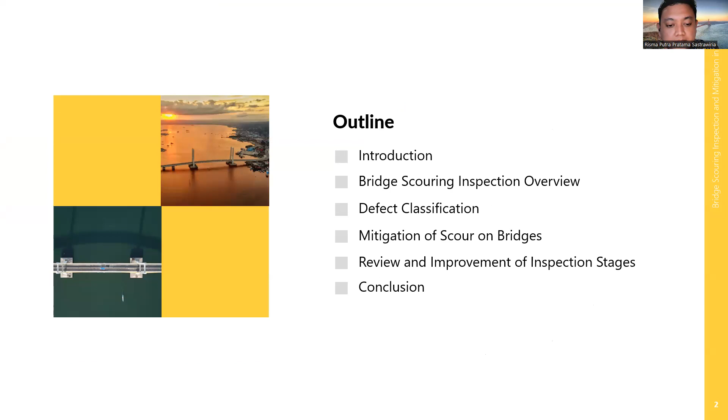Bridge failure due to scouring in Indonesia has reached more than 3,000 unit collapses, calculated over the last 10 years. This data was obtained from the manual collection of the National Disaster Management Agency, based on reports and information from the field. This condition caused many problems, including traffic jams and disruption of logistic delivery around the affected area. This should provide awareness that bridges are an important part of the road network structure.

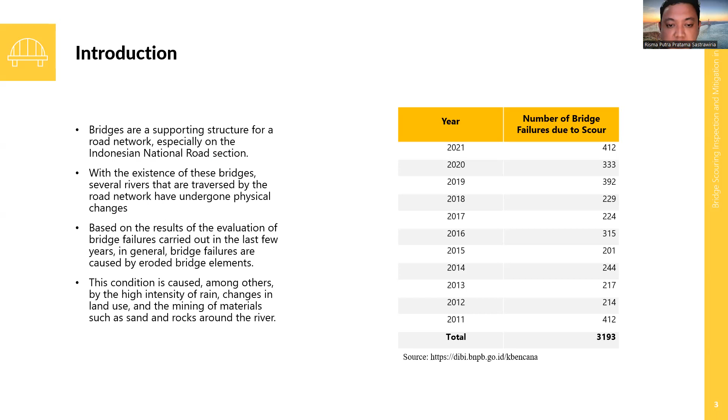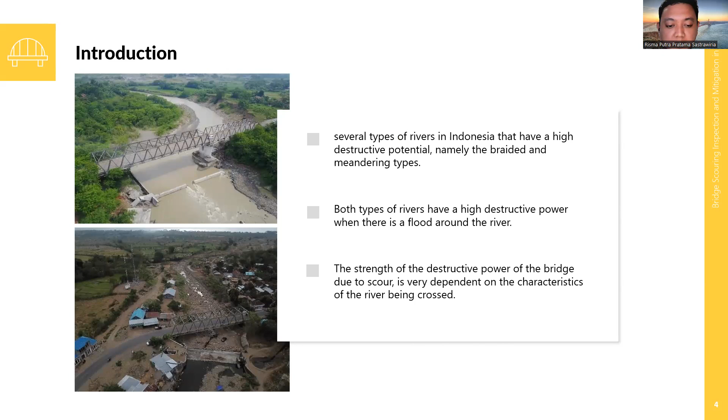Several bridges in Indonesia are located on rivers that have high potential to damage and erode the bridge. The types of rivers with this potential are braided and meandering rivers, and these two types have caused a pretty bad record on bridge performance in Indonesia.

In a recent case in 2020, there were 3 bridges that collapsed at the same time in one area of the national road section, caused by heavy river flows. All affected bridges were in the same area, causing transportation and logistic obstruction. The 3 bridges are Kosio Bridge, Sinandaka Bridge, and Sinandaka 2 Bridge.

In addition, there are about 15 other bridges, some heavily damaged and some in critical condition.

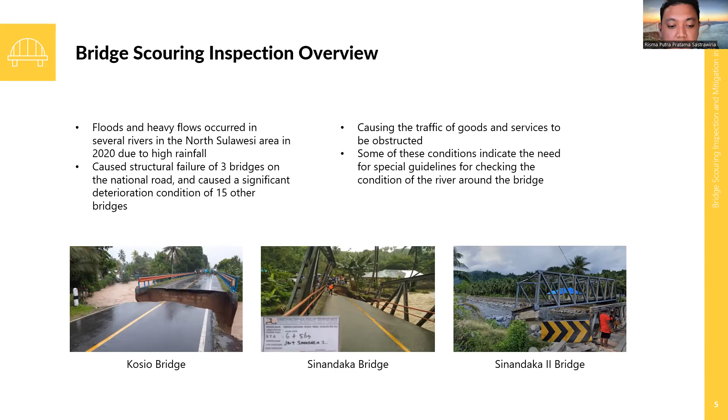Based on this situation, the Directorate General of Highway required a more detailed guideline to provide assessment of the condition of the river around the bridge. This guide is prepared in the context of mitigation and is part of the overall bridge management system in Indonesia. These guidelines were officially published in mid-2021, about 1 year after the great disaster occurred.

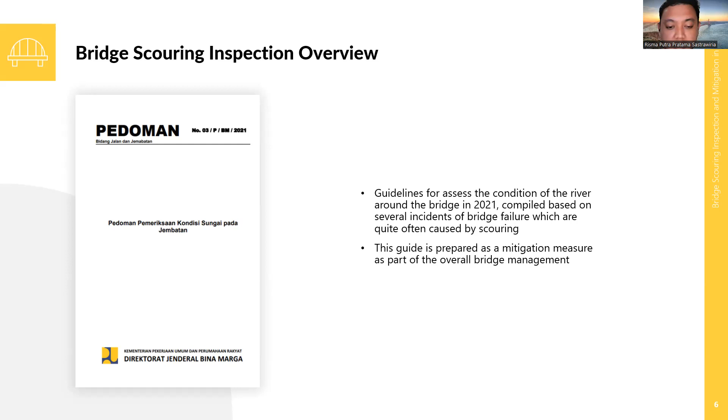Several things are clarified in the guidelines, including the procedure for assessing the condition of the bridge, which starts with determining the type of river around the bridge. With this stage of determining the type of river, it's hoped that we can improve a more objective assessment of bridge condition.

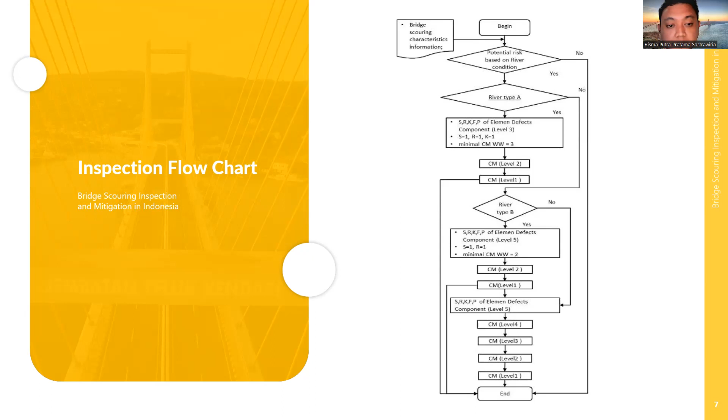The condition mark is given as follows: Condition 0 is a condition with no defect. Condition mark 1 is very minor defects. Condition mark 2 is defects that require monitoring or maintenance in the future. Condition mark 3 is a defect which requires attention soon. Condition mark 4 is bridge in critical condition. Condition mark 5, the element is broken or the bridge is no longer functioning.

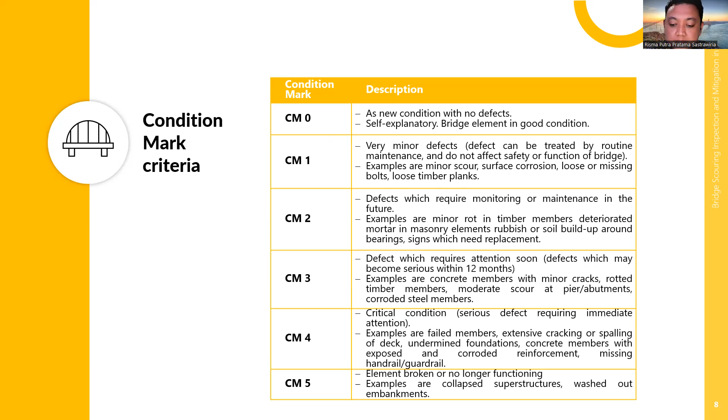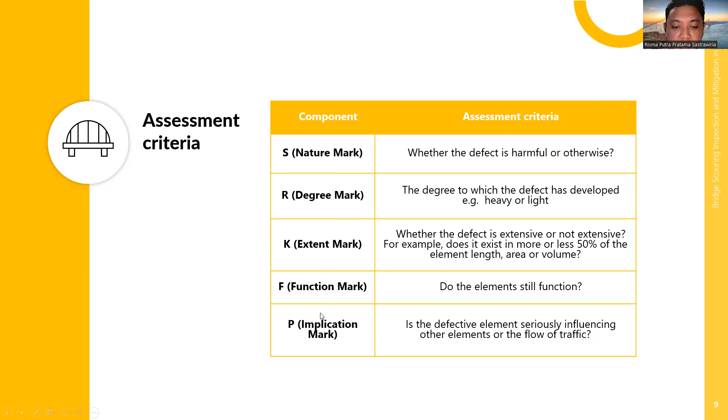To get the condition mark of the bridge, there are 5 assessment components that determine the value of the condition: nature mark, degree mark, extent mark, function mark, and the last one is implication mark.

This is the component, some of them are made into guidelines. There is an S mark and R mark that have been detailed quite clearly, making it easier for inspectors to determine the damage occurring in the field.

The following is the S mark explanation for defect classification of the waterway around the bridge, such as siltation, debris accumulation and obstruction, scour, and excessive afflux. The nature mark S is seen as below.

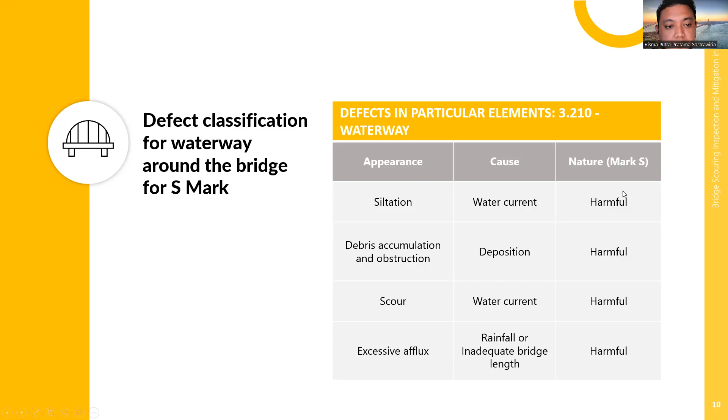The following is the R mark explanation for the defect classification on the waterway around the bridge. There is a criteria of the assessment, and the degree mark R is light and heavy.

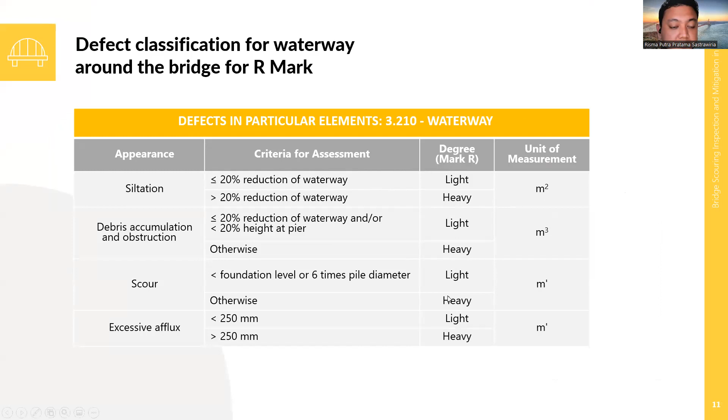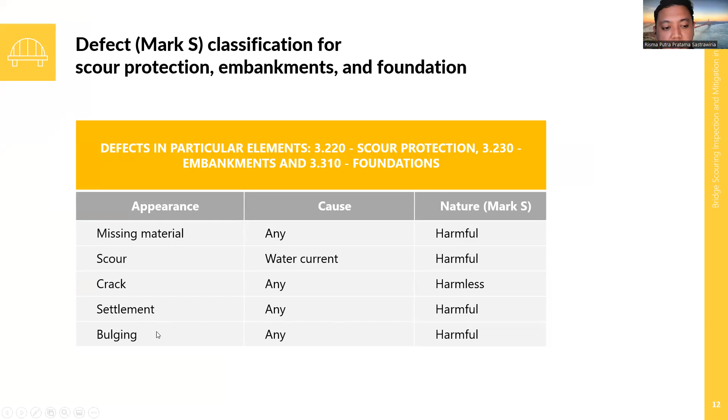The following is the S mark classification for the scour protection element, embankments, and foundation. The appearance is like missing material, scour, crack, settlement, or bulging. And then this is the mark R for the scour protections, embankment, and foundation element.

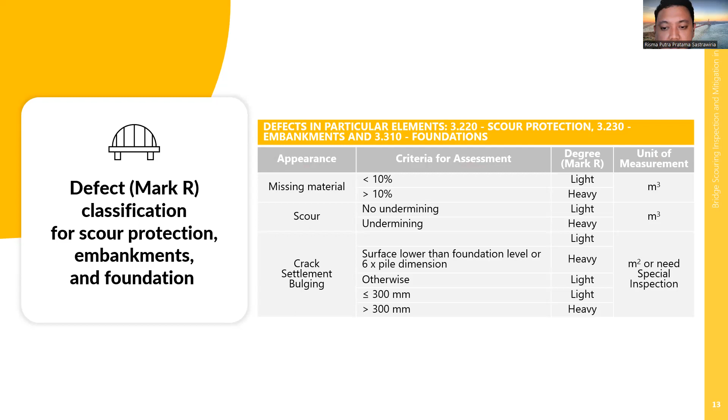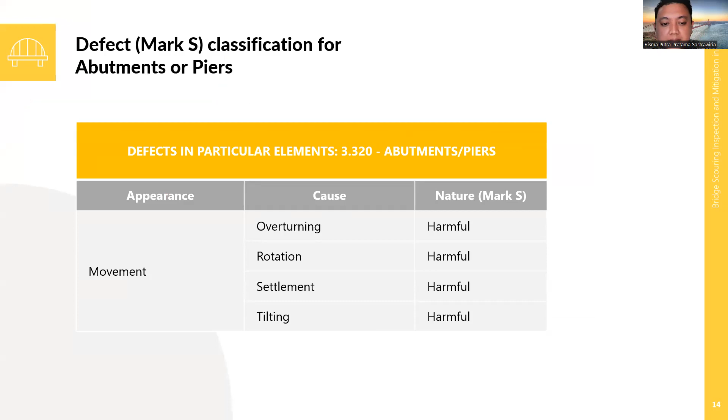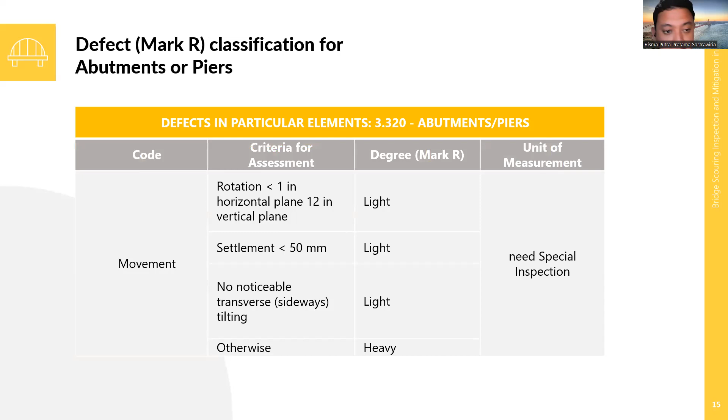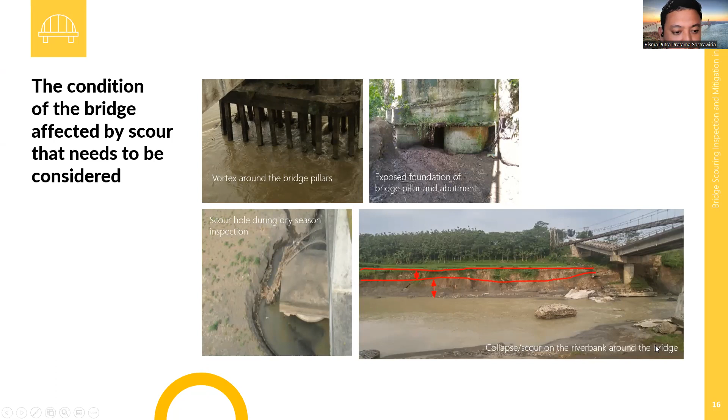With some conditions that have not been well described in the inspection report, several improvements have been made to support the assessment of the bridge condition to make it more accurate. That is the collection and measurement of river topography data around the bridge location, which includes the cross section of the river equipped with river contour drawing. And then collecting data on the gradation of riverbed material around the bridge.

And then collecting data on existing and future activities around the bridge site, such as sand and rock mining, chute cutoffs, bridge construction plans, micro hydropower development plans, and so on. Next is analysis of river morphology related to the change in the riverbed in the vertical direction. And then identification of meandering river behavior that has the potential for scouring hazard around the bridge, so analysis of change in river morphology in the horizontal direction is required.

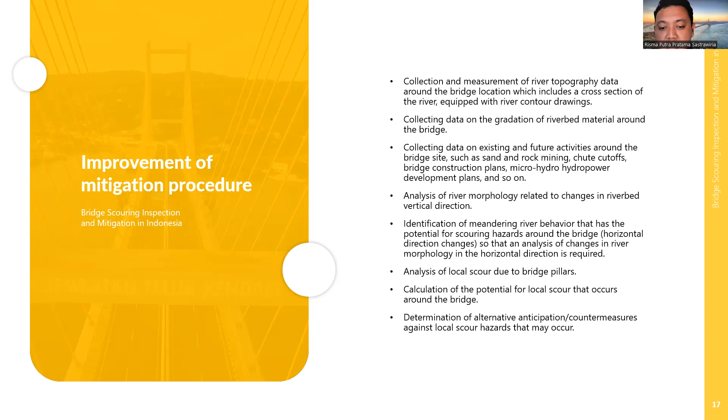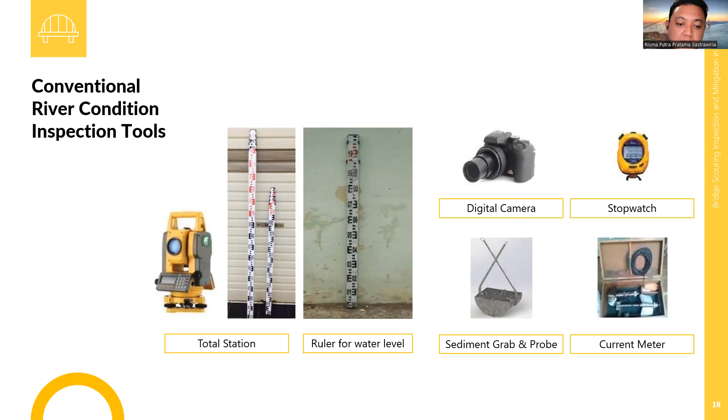The following are the supporting tools for detailed inspection of the bridge, such as total station, ruler for water level, digital camera, stopwatch, sediment grab and probe, and current meter. And the following are special tools that determine the depth of the riverbed to the river water level, with fathometer for echo sounding, sediment sampling, and drone for mapping the surface of the river.

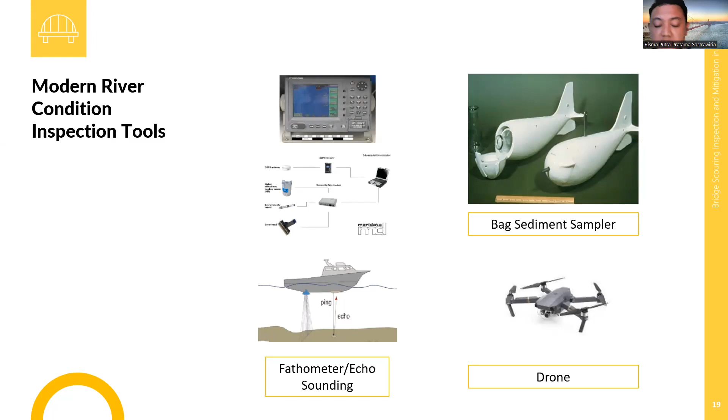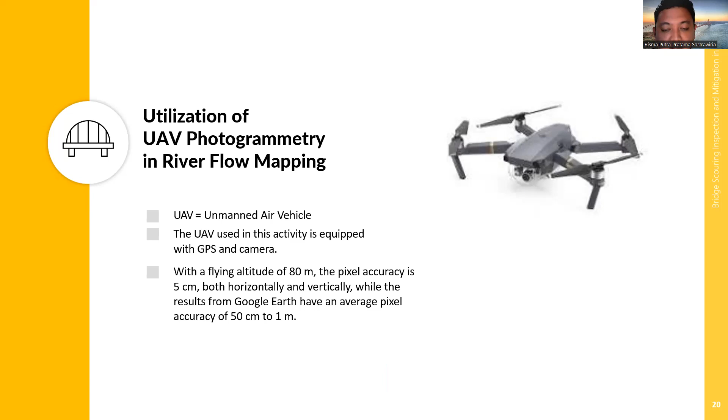To fulfill the need for photos of the river condition, one of the techniques to support a more objective assessment is to use a drone that's set to fly in a certain path and altitude to take a picture of the top view, which will then be displayed, processed using software, and be the basis for analyzing field conditions. The photos taken from the drone are then processed with photogrammetry to generate 3D data utilizing sparse point cloud and dense point cloud processing, which will later be converted to contour analysis.